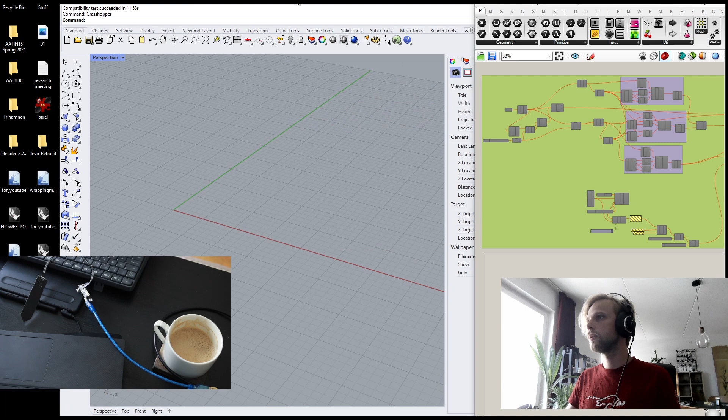Maximize that. Let's actually do it this way. Hello. Let's do it this way. Like that. Turn off that. You go here, or maybe here. Make myself smaller. And this way. There we go.

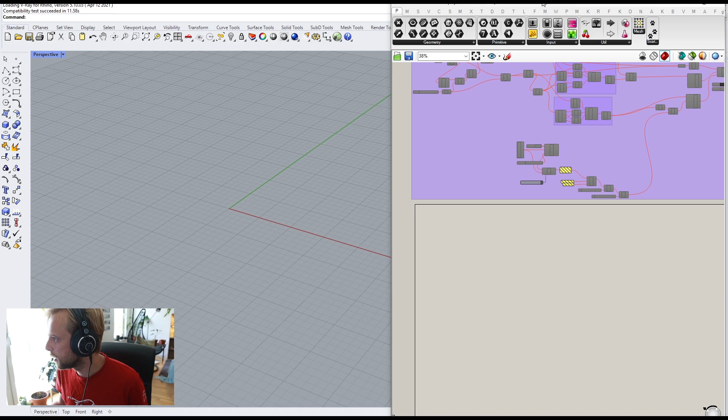So now, in here, I need to actually talk with Arduino through Grasshopper, right? So how do we do that? Well, the first thing is using Firefly. That's the plugin that we're going to be using, Firefly. You can download it from Food4Rhino, and just keep in mind it has a 32-bit version and a 64-bit version. You want the 64-bit version, not 32 bits. Okay, so you just download it, and you will find the Arduino tab here.

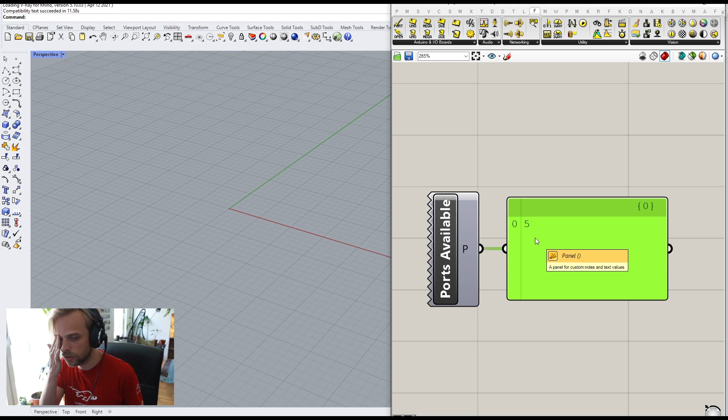And what you want to do is open up the Arduino port so that you can listen to what this moisture sensor is actually saying, what kind of number it's giving, right? So I will say com ports available. First, we check what kind of ports are available, like that. And I can see that if I just grab a panel, it says 5. That means port 5. And it's actually the same port that we used in our Arduino, so it makes sense.

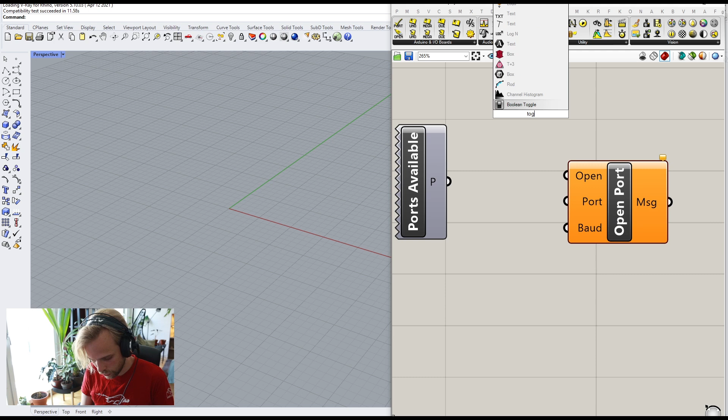And then under Arduino, we can open or close it, right? So open/close port, we choose that one. Bam. 3 inputs. First one, is it open or closed? I will want to open it, so I will use a toggle for this. And for now, we keep it closed, so toggle is set to false. Then port. We have the available ports here, and it's port number 5, so I just connect it, like so. Easy. And then the last one is the baud rate. Remember, 9600, the number that we used? This needs to match. If it doesn't match, it's not going to work. 9600.

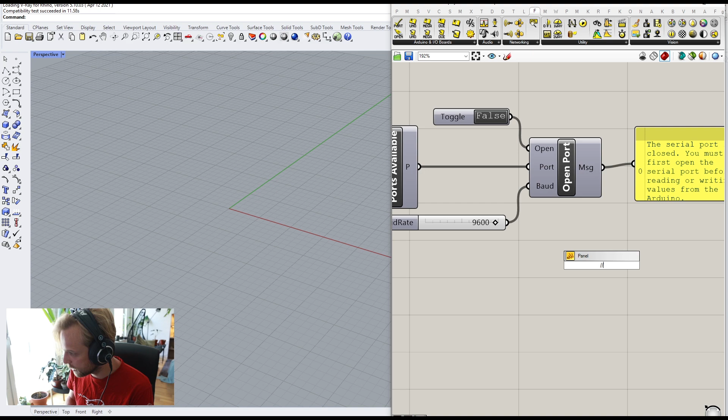Bam. Opened up. Well, actually, no, it's not opened up. It's closed right now, because toggle is set to false. If I grab a panel, by the way, double click creates a panel. The serial port is closed. You must first open the serial port before reading or writing values from the Arduino. Okay, sure. Double click on the toggle. It's true. Hooray, the serial port is open and you may now begin reading or writing data to the serial port. Okay, so we have opened up a connection to the Arduino within our Grasshopper.

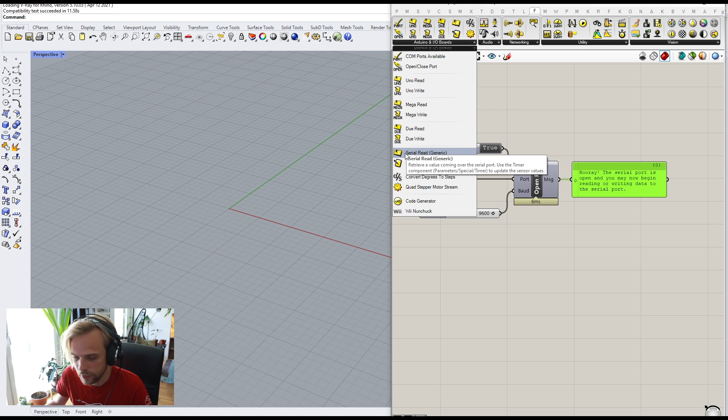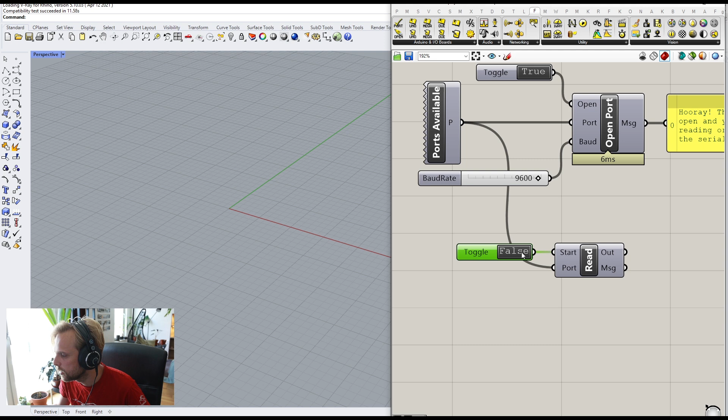Next step is actually reading something from the Arduino. In this tutorial, we're just going to read. So we will use serial read, generic, bam, and it's going to ask for 2 things: start reading and port number, right? So port is going to be the same port that we have available. That's easy. And start is going to be another Boolean toggle, right? Connect it to start. Double click on true. And now we are reading. So let's see what kind of output messages we get. Output 828, right? Message: now reading values from the serial port.

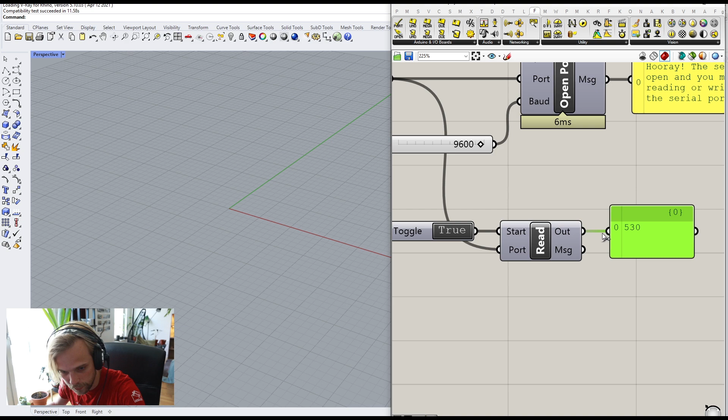There's a problem, right? 828, while this is indeed a value that we get from our sensor, it's not updating, right? Even if I put it in my mouth, see, it's not updating. It's still 828. The only way I can make it update is if I toggle it to false and to true again. Now it's updated, right? I'm holding it, so that's why it's 530 now, because my fingers are wet. Now I let it go, update it, 827 again. So it's not updating the way we like, in real time. How do we make it update?

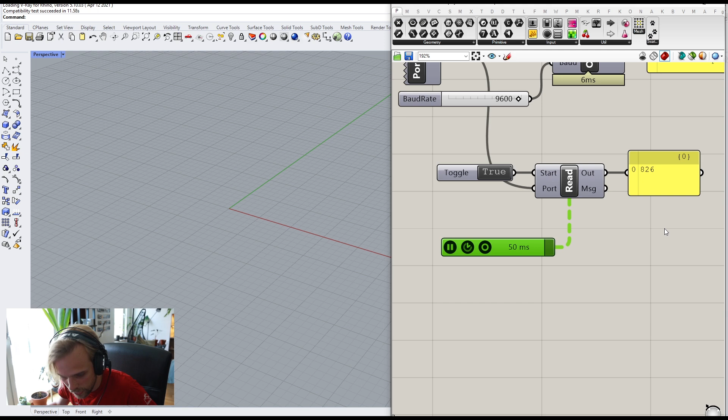Well, for those of you who are using Rhino 6, it's called timer, right? For those of you who use Rhino 7, it's called trigger, but it works in a similar way. For a timer, or for the trigger as well, you right-click on it. For interval, you choose 50 milliseconds, bam, and you just drag out of it and connect it to the read. So it's going to trigger a refresh for this node every 50 milliseconds. And you can see this number is now changing. If I hold it, bam, or put it in my mouth, see?

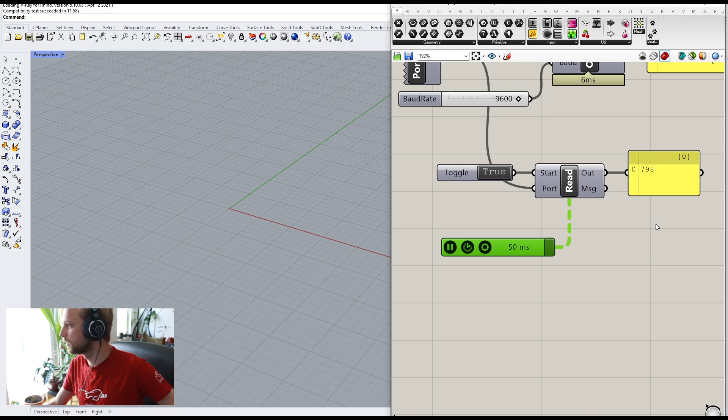Great, now we can control it. Now we're golden. Okay, for this, we need to create some sort of a form, something that will work.

And I will just grab a little bit of coffee and we will continue. So I drank my coffee and now we continue.

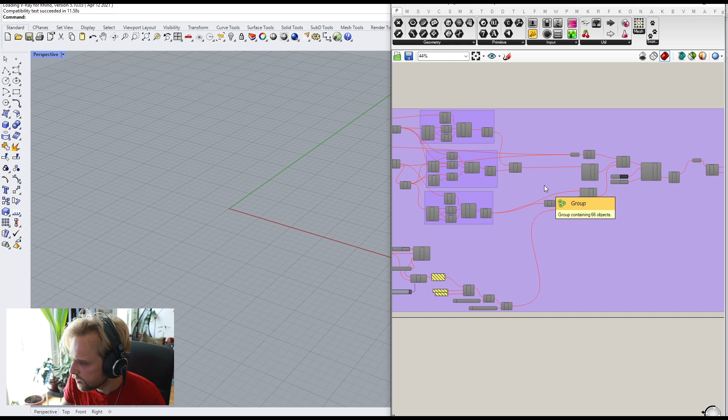So again, this guy is calculating correctly, and you can always just connect a sphere to it and a sphere radius to it and make the sphere contract and expand according to this number, but that's kind of boring. Let's do something more fun. So I've decided to do, how is it called, isotropic moisture bending, something like that.

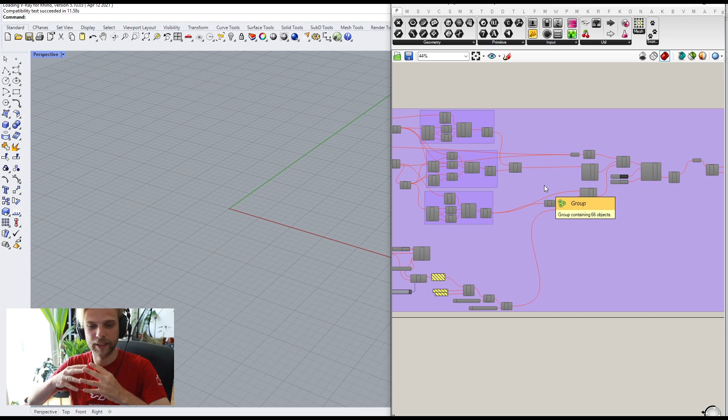When wood gets wet, or one side of the wood gets wet, it bends, right? We are going to simulate that with Kangaroo, and we're going to hook up Arduino to trigger that bending of the wood. So there's kind of an interplay between moisture and the actual plate bending and so on. It's gonna be fun.

So how do we do this actually? Do we just do a rectangle? Yeah, let's just do a rectangle. So I'm just going to create a rectangle in Rhino, starting from 0, and give it like 10 by 10 millimeters or whatever. Just a rectangle, and I'll use PlanarSrf, planar surface, to create a surface from that rectangle.

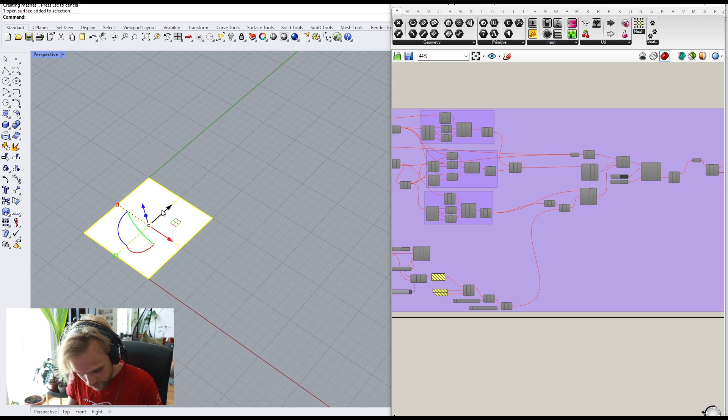I know this is a weird way to create a surface, but this is the one that I'm used to, and we're sticking to it. So we have this going. Then I'm going to just copy that rectangle, maybe 1, 2, 3, 4. Let's go for 5 times. That doesn't matter. So we have a bunch of these rectangles here.

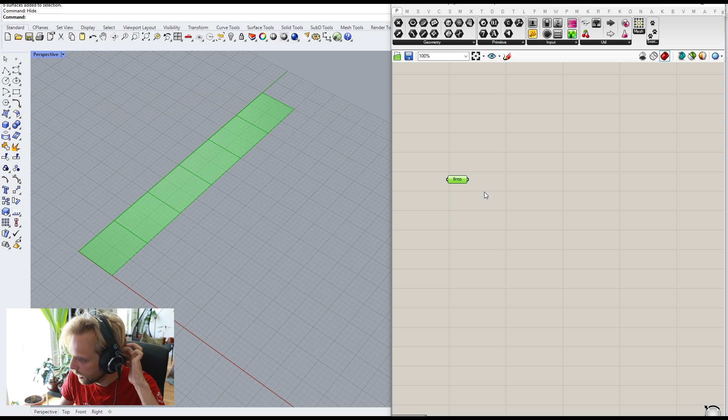So now I'll just move this a little bit to the side. I will reference them in as multiple breps. So right click, set multiple breps. All of these get referenced, enter, bam, they're now in Grasshopper. So now I can just hide them here so that they're not in the way. So these are breps. I will need meshes.

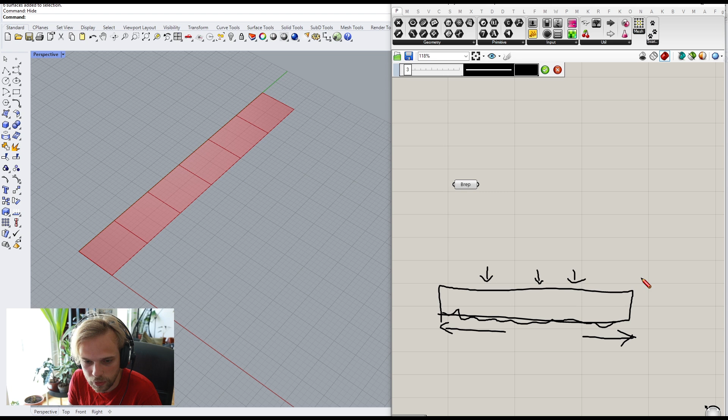By the way, just to explain what I'm after, let me scribble this. What I want to do is, if I have some sort of a form, and the bottom part of it gets wet, it will expand, while the top part is not wet, so it's going to stay as it is. So what it's going to do is bend, like so, because the bottom is expanding and the top is not.

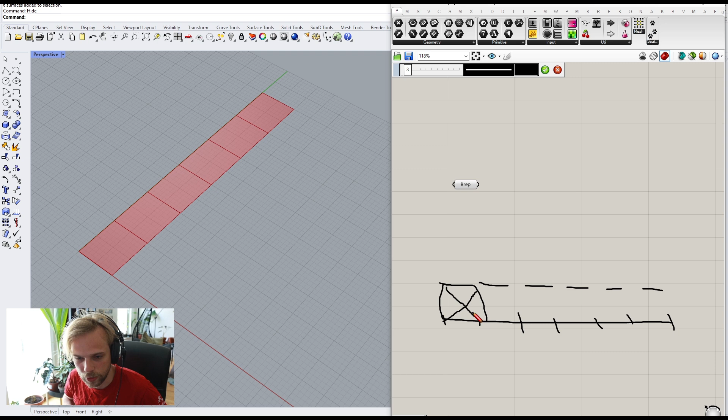So we're gonna try and do that by taking a surface in the bottom, divided up into parts, into polygons, and we have an identical surface in the top that's also made out of parts, and we interconnect them. Oh my God, I've just missed that line. But we interconnect them with this X system, so that every node between these two surfaces is completely tied together, and it's a rigid structure.

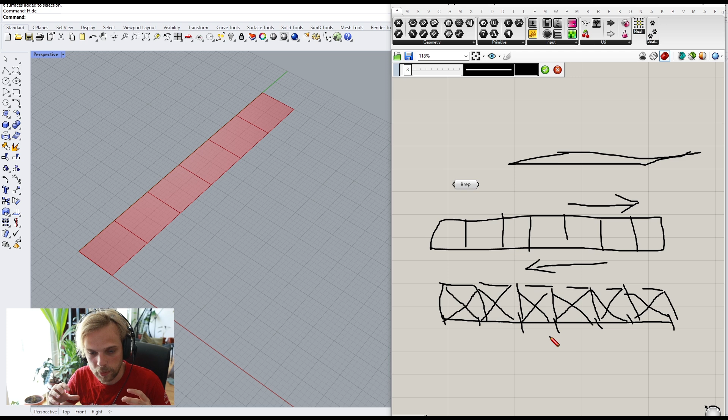I don't have the words to explain it well, but basically, if you have a structure like this, then all of the connections are interdependent. If you just had a structure like this, then it could bend this way, it could have this kind of a shear bending, where it just tilts. But if you have it cross-braced, it can't tilt, meaning it's a stable structure, and it's going to be a much more accurate representation of how the geometry would bend because of the moisture. Anyway, so that's the idea.

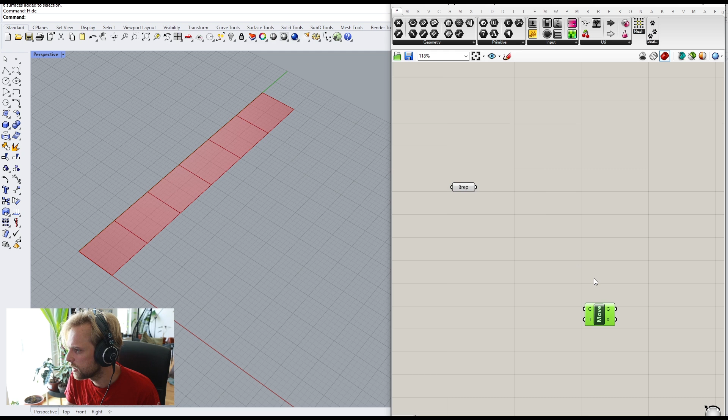So I have the surface here in the bottom, and then I'm going to move it. Or no, let's create. Do we need to create a mesh from it? Not really, huh? But let's still create a simple mesh from these breps. So we have like 6 meshes here, and we use mesh join to join them up into one big happy mesh. Okay, so that is done.

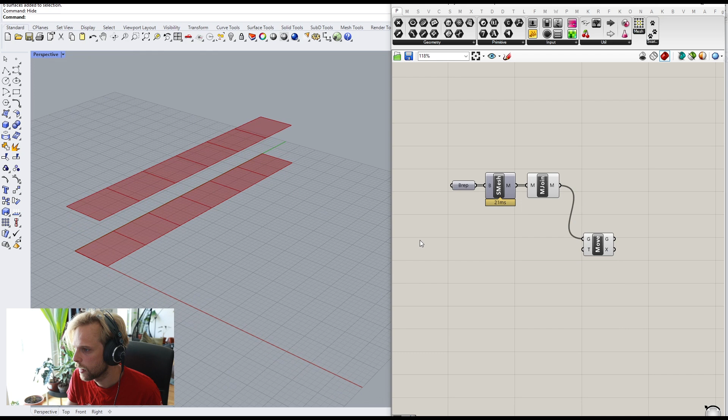We have a bunch of meshes here, and then one single mesh here, and then we move that mesh up in Z direction by, I don't know, let's do 5 for now. We can always change this, right? So we have the bottom layer and the top layer.

And the bottom layer is going to expand while the top layer stays the way it is. Okay. So now for the cross bracing, right? Let's maybe first create cross bracing for, let's just work on the bottom layer for now. And let's just create cross bracing right here, right? For every polygon, we create an X.

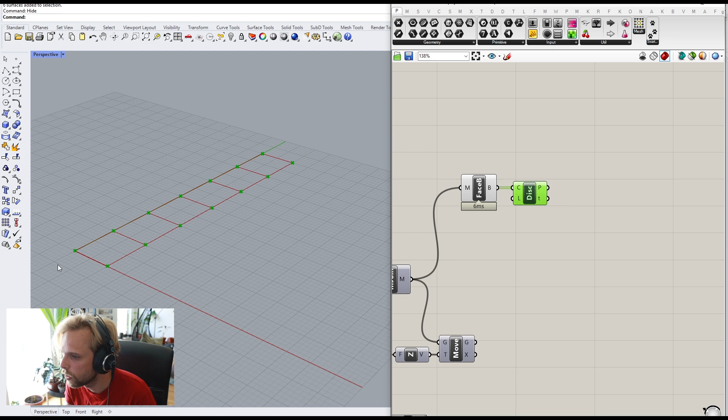So I'm going to say, give me face boundaries of this mesh. So I'm getting basically a polyline around each face of the mesh, face boundaries. And then for these face boundaries, give me discontinuities, corners, basically corner points, right? So I get 4 points for every polygon. And then I will separate those corner points into separate outputs.

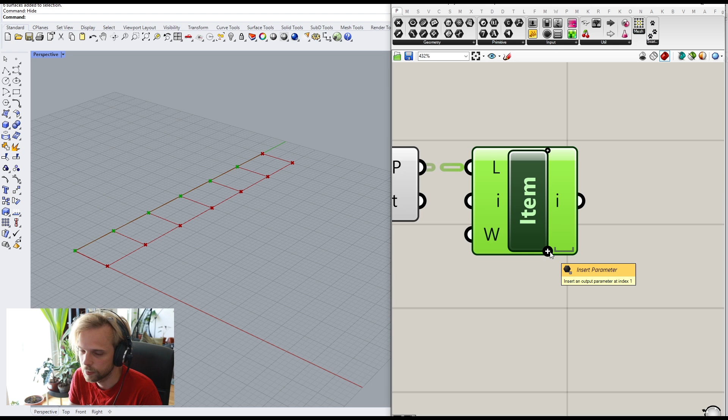List length? Nope. What am I saying? List item, not list length. List item can be used to separate these points. So this is point number 1 in the list, or number 0 actually. Point number 1 is here, point number 2, and point number 3. So I have 4 points here as separate outputs.

And now I'm going to just connect them, right? So if this is 0, 1, 2, 3, 0 needs to connect to 2, and 1 needs to connect to 3 with a line. So I'm going to use line tool, line between 2 points, this one right here. And I'm going to connect 0 with 2, bam, like that. And then I'm just going to copy paste, and connect 1 with 3, bam. I have an X now. Great. So this works, right?

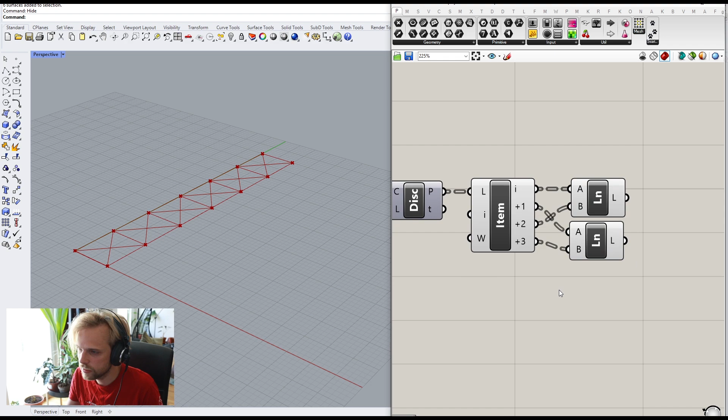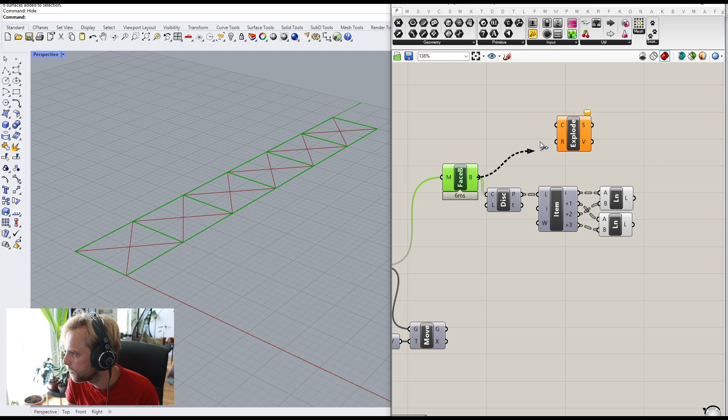And now, this is a separate line, this is a separate line, and these are polylines. So I don't want them to be polylines. So I'm just going to explode these rectangular polylines here to separate line segments. And then I'm going to merge all of these separate line segments into one list, right? So for that, I will use merge. Segments go into D1, lines go into D2, lines go into D3. There we go. Everyone is in one list.

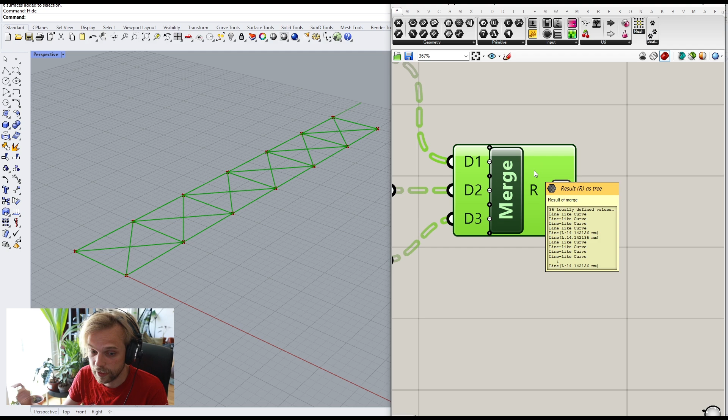Well, not quite, because you can see this dashed line. It means that there's a data tree going on here, and I don't really want a data tree here. So for the output, I'm just going to flatten everything out, right? So now everything is definitely in one list. But there is one thing that we still need to fix. This rectangle and this rectangle, they share one edge here, which means that there's a duplicate line here. There are 2 lines here, right? I want only one line to be here.

So what I'm going to do is I'm going to say remove duplicate lines. Remove duplicate lines like that. And it basically gets rid of all of the duplicates, right? It just keeps one instead of two. I can hide all of that. And now we have our cross bracing for the top done, right? I can just group it like that.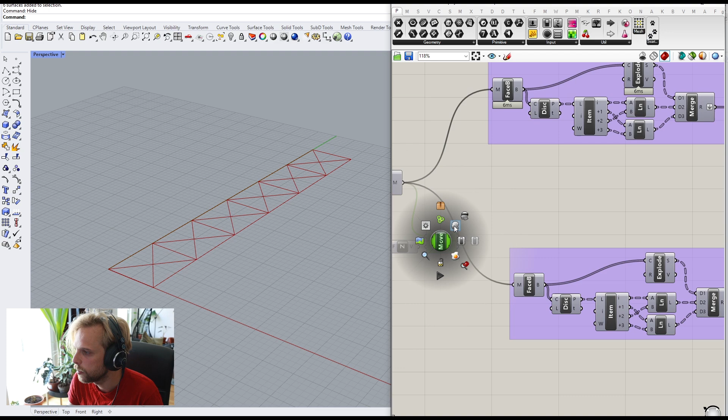I'll copy, paste it here, and use it for the top mesh as well, right? So all I need to do is just, bam, do that. And I have the cross bracing for the top. So that was the easy part. The hard part is going to be the sides, right? But I don't think that's going to be super hard to do.

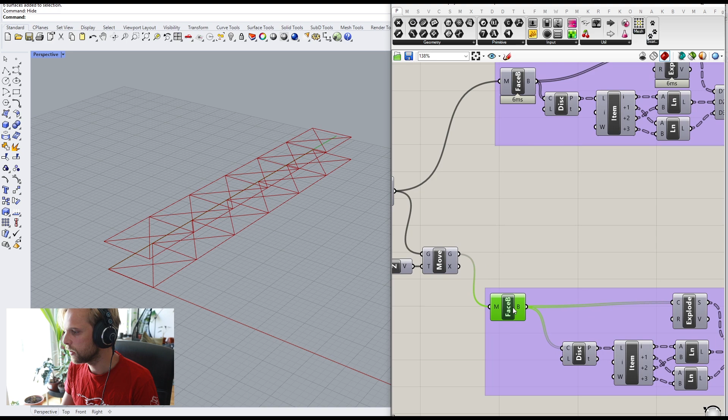So for the sides, let me just check how I did it. Yeah, all we needed to do was just shift, right? Yeah, that's fine. Okay, so we just shifted. So here we have face boundaries, and here we have face boundaries, right? Let me just show you. Bam, bam. These face boundaries. And these face boundaries have discontinuities. And I'm going to do the discontinuities again. I know that I could reuse the discontinuity nodes here, but I want to keep things clean.

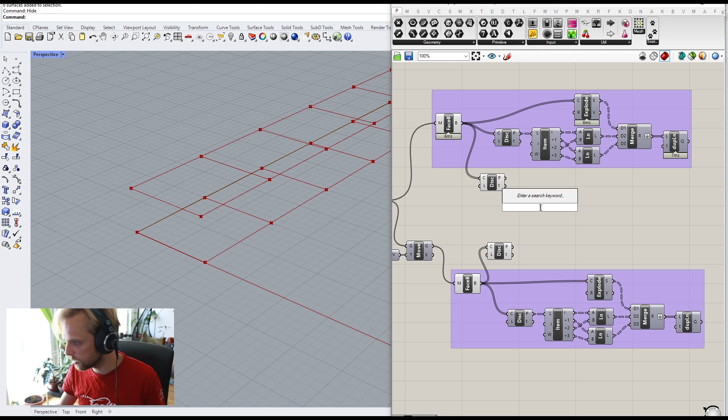So discontinuities come in from here, and discontinuities come in from here, right? So I have these points. And I can actually show you the numbering of these points by using point list. Point list tool, bam, like that. And then using size. Just a second, thinking. This is in millimeters, so let's use size 2. Like that.

And then copy paste. Like that. Okay. So now you can see the numbers for these points, and here where we have duplicate points, there are 2 numbers, but basically they match, right? So above 0 we have 0, above 1 we have 1, above 2 we have 2.

So to create vertical connections between these, all we need to do is just do a line between these points and these points. That's it. 0 connects to 0, 1 connects to 1, 2 connects, and so on. So we have vertical lines. There's duplicates here, but we will fix those in a second.

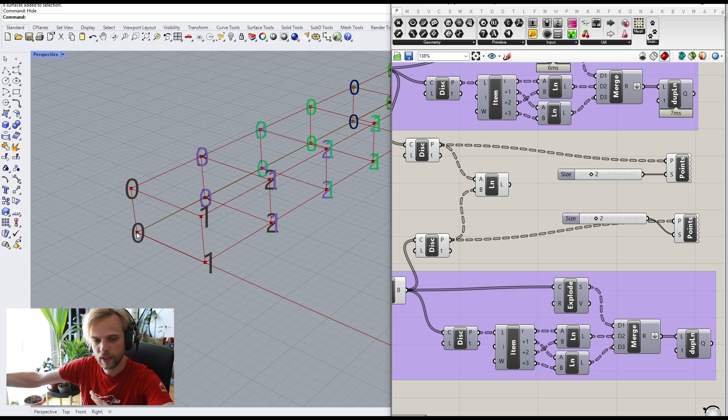The trickier part is the X cross bracing. And to do that, all we need to do is say that 0 needs to connect with 1, and 1 here needs to connect to 0. So we need to shift the list forward by 1 item, and then we need to shift the list backwards by 1 item, right?

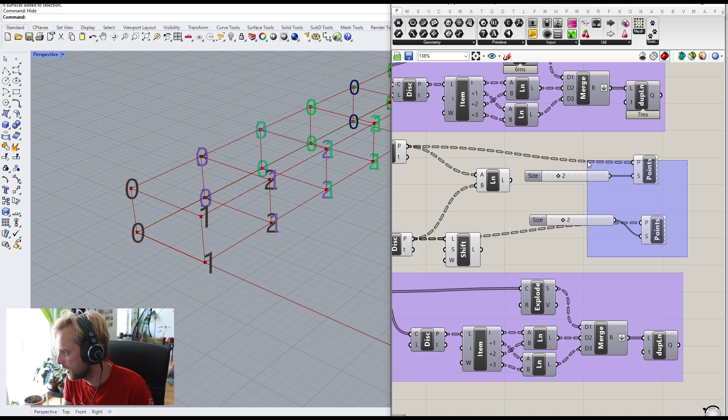So for this, we will use shift list. It doesn't matter which one we shift, the top or the bottom, that absolutely doesn't matter. So I'll just shift the top one, well, the geometrically top one, but in the definition, it's shown in the bottom. I'll shift that list, and by default, it shifts by 1, right? Actually, let me delete this so that it's not so much in your face.

So now with the line tool, it already will create a diagonal connection like so, right? 0 connects to 1. And now if I shift the list again, and I know this is getting cramped, I'm sorry about that, but this time by -1, I'm just creating a panel here saying -1, or you can right click on the S input, go to set integer, and type in -1, doesn't matter.

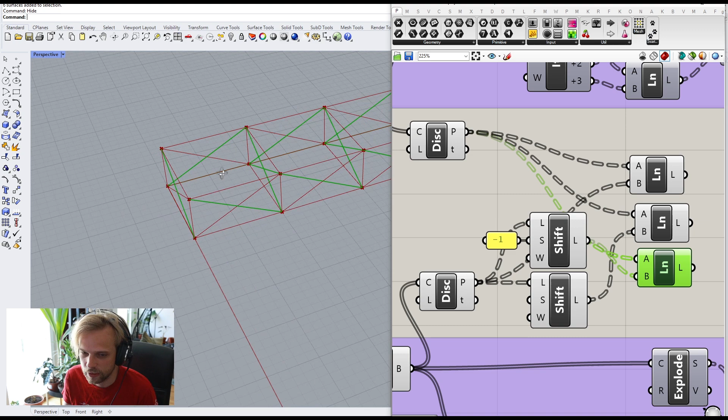If I shift it backwards by 1, and I create a line again between the bottom point cloud and the shifted point cloud, now I get the X cross bracing here. That's done. We have it. Everywhere where these boxes meet, it's going to be a bunch of duplicate lines. So we'll need to fix that. But we already know how to do that, right?

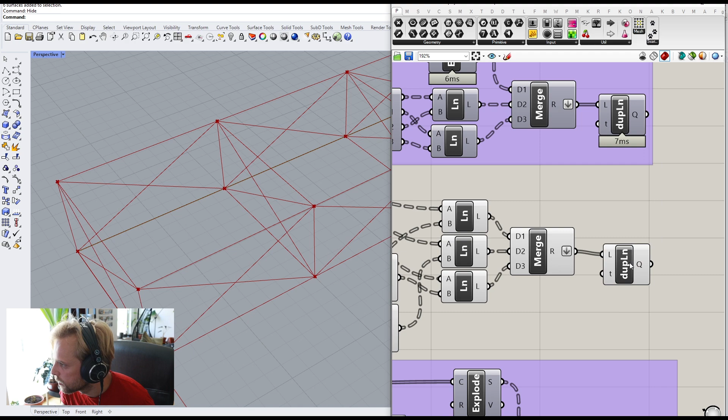We merge everything into one big happy list, like that. We flatten out the output, and we remove duplicate lines, like that. That's in Kangaroo 2, by the way, remove duplicate lines. And we have that. Part done. Okay. So now, what do we have here? We have cleaned up lines in the bottom, in the top, and in between, right? So now we need to come back to our idea of how that whole expansion is going to work.

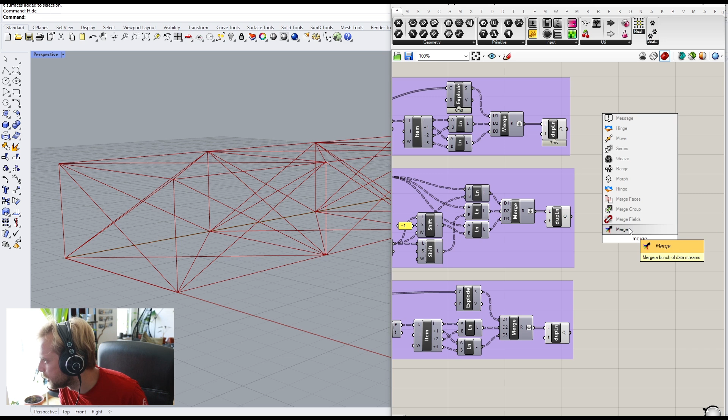The ones that are on the bottom, these ones right here, are going to expand, right? And the sides as well as the top are going to try and keep their original length because they're not wet. They're not expanding. So I'm first going to merge the top as well as the sides to one list just to keep it clean, right? And here I'm just going to have this as a separate output.

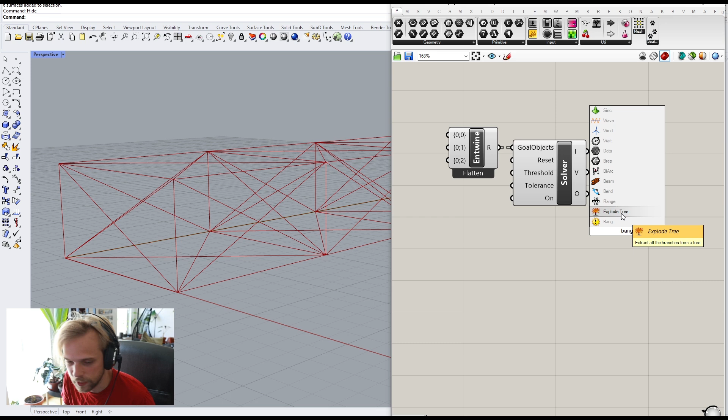So now it's time to actually use Kangaroo. Kangaroo 2 uses a solver. So we're going to use a Kangaroo solver. For goal objects, we are going to use an entwine. This will just help us make a data tree and keep all of the inputs clean, right? And for the output, we will use explode tree. So we're basically creating a data tree and then exploding it into separate branches.

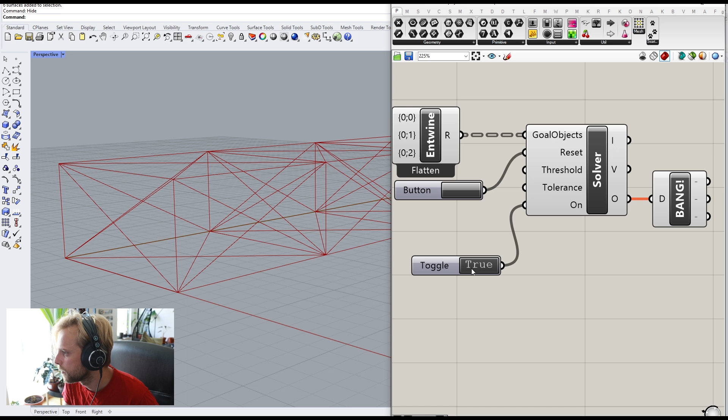Then we will need a reset button, and an on and off switch, which is going to be a toggle. Okay, so we have our initial Kangaroo setup done. So now what are the goals for our simulation? Well, goal number one is always show. We're going to show some sort of geometry after the simulation has finished, right? So what kind of geometry is it?

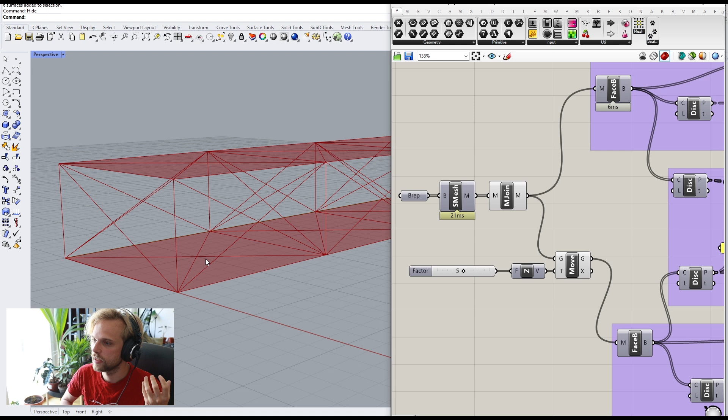Well, we will still need to make it nicer, but it's basically going to be the bottom mesh as well as the top mesh. Do we color code it? Let's color code the part that actually expands, which is going to be the bottom mesh right here. So that is going to come in as a separate mesh. So I'm just going to straight up connect it to show, like that.

But for the top mesh, what I want to do is take its mesh edges. I want to take all of its naked edges and I want to extrude those naked edges in Z direction.

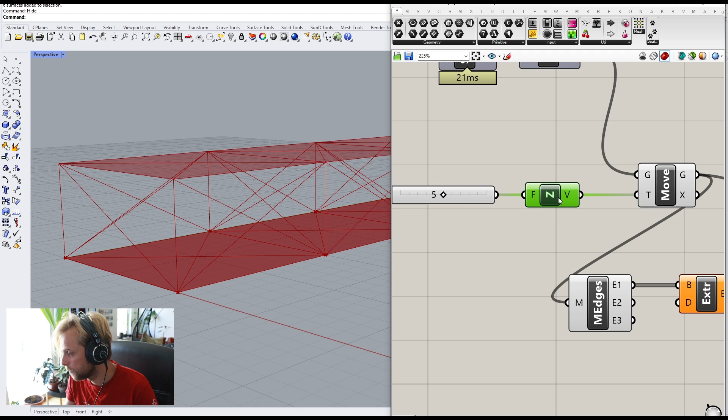Or actually, we can just use this one straight up. So we are moving it up by 5, right? So we need to extrude the perimeter of it down by -5, because it's down, right? So I will just use the negative value of this vector, and I will just straight up connect it to the D input here. And that's it. We have our...

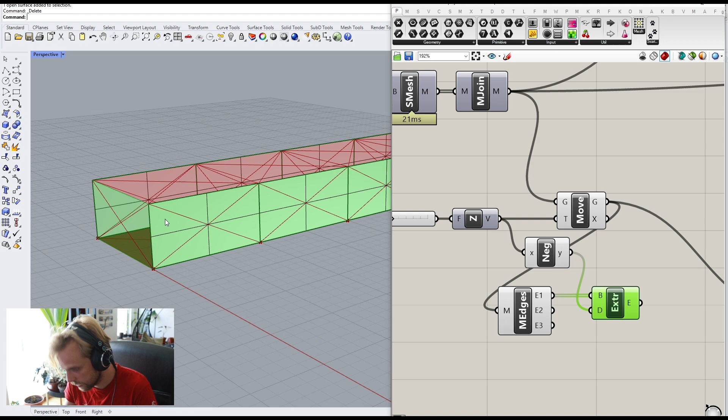Wait, what is that? Wait. Something strange. If I delete this, no, this is clean. Okay, never mind. Sorry. Just a visual glitch. Okay, so now I've just extruded the perimeter down by 5,

and I will just convert it to simple mesh. So these extrusions are being converted to a simple mesh, and they're going to be joined, mesh join, with the top, right? With this. And simple mesh, holding down the shift key, gets joined up here. And just in case, I will right click on the M input and choose flatten so that everything is flat. Everything is in one list.

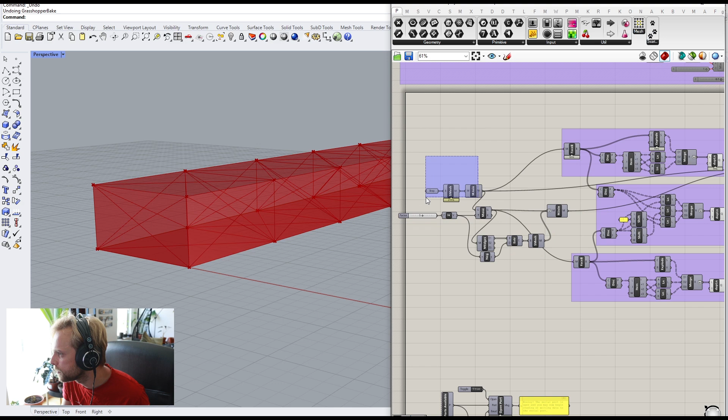And then again, holding the shift key, I will connect it to the show input right here because we will want to show it. Bam, like that. Okay, this is a little bit messy, but it is what it is. So our show input is done, and we can see that bang actually gives us an output. The output that bang gives us is 2 meshes, the ones that we are telling Rhino or Kangaroo to show.

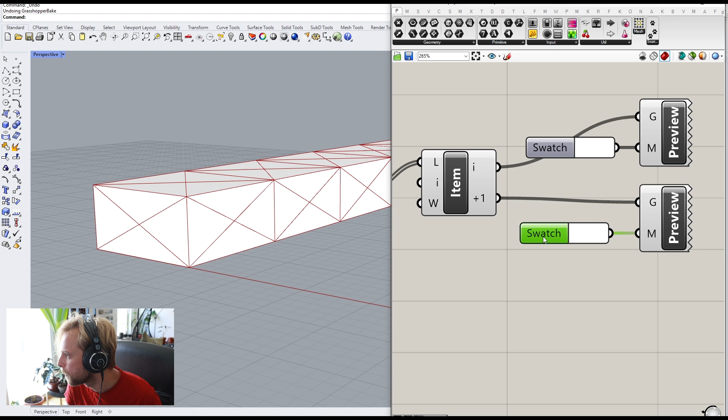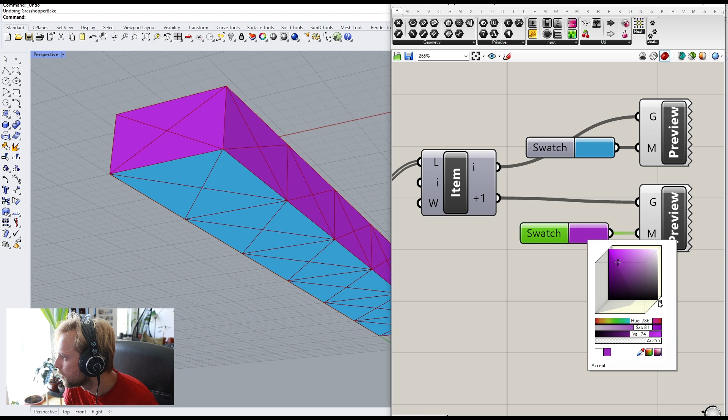So I'm going to use list item to separate them into 2 separate entities, first and second one. And I will use custom preview for the first as well as the second one. And I will use color swatch to control the color of both of them. So for the bottom one, I will change the color to blue. And for the top one, maybe purple. Come on. Oh, purple is whatever. Let's go for dark pink.

So we have blue that is going to be expanding, and we have dark pink that is just not expanding, the rest of the geometry. Okay, so that works. And actually now we can make this thinner, like that. Okay, next up, expansion, the actual expanding part of it. That is actually quite simple.

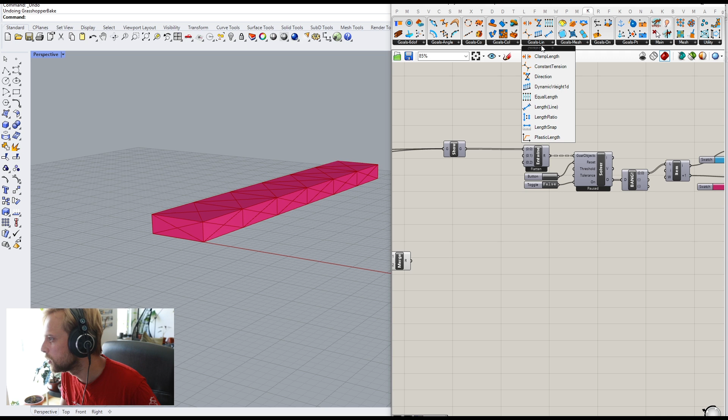Under the Kangaroo 2 tab, under goals line, you have length (line). It's asking us to give it a line segment, so I'm going to give it all line segments that are in the bottom. And it's asking us for a length, and we don't really have a length for them. So I'm just going to measure the length of a curve. Just type in length, and measure the lengths.

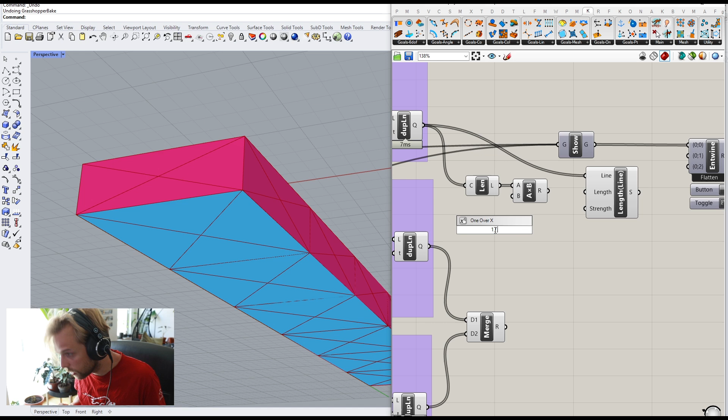And we can multiply the lengths by a factor. So let's say we have a slider that starts at 1 and ends at 2. And actually, let's give it 2.000 to give it more resolution for the slider. So a slider between 1 and 2. I connect it to the multiplication.

What it does is it takes the lines, takes their original length, and if we have it set to 1, it keeps them at their original length. If we have it set to 2, it expands them twice, to 200% of their initial size. So it just multiplies. I connect it to length like so, and connect the spring output to the 0, 1 input of entwine. That's our second goal.

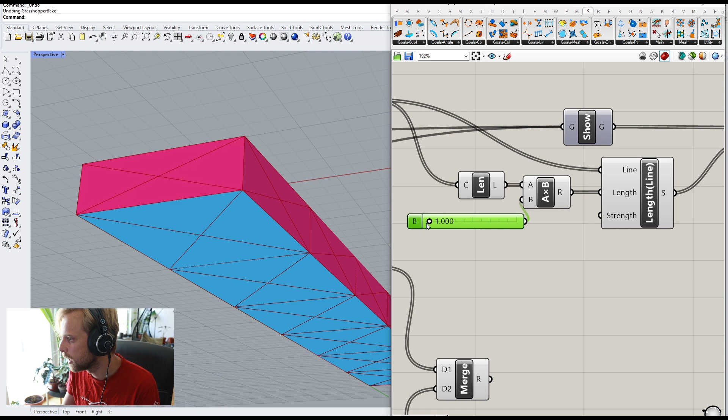If now I reset and run the simulation and actually expand this, you can see that it's kind of boring. It just basically scales everything up, nothing fancy, and then scales everything back down. That's because there's nothing that would restrict the scaling. So now it's time to actually make it restrictive. For this, I need all of the remaining lines not to expand, or try not to expand. So I'm going to use length line again.

I never can find it. Goals line, length line, this one again. This time I'm going to use all the rest of the remaining lines. I'm still going to use the length measurement, but this time I'm just going to connect it straight up into the length input here.

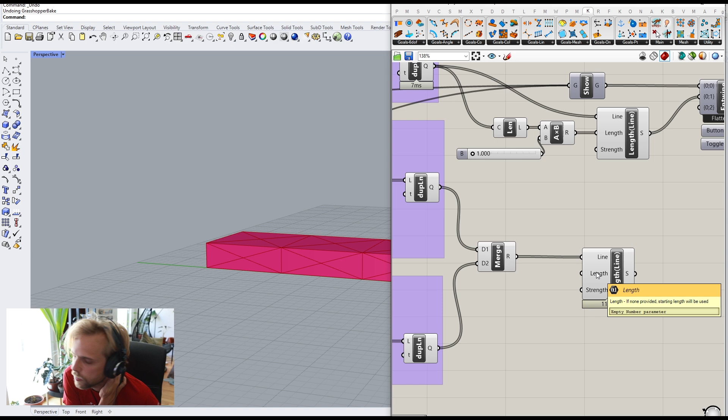I think even if you don't do it, what does it say? Length: if none provided, starting length will be used. So even if we don't connect anything to this, all of the lines will try to keep their original length. That's great, we just keep it this way and connect it to zero-two input here.

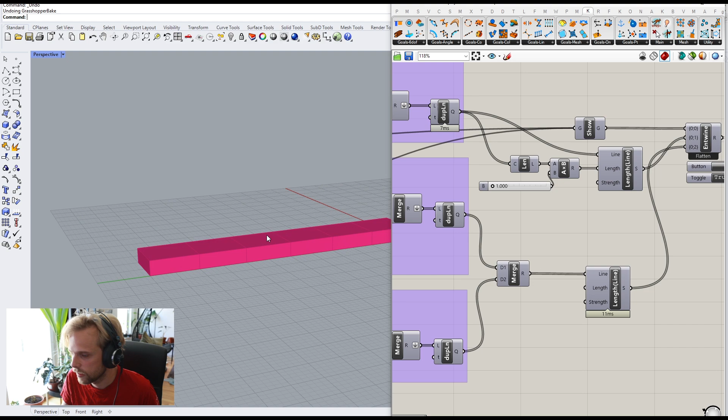Disable preview of all of this. Moment of truth. Reset, play. Okay, nothing exploded, that's good, that's always good news. Expand. Bam, bending, yay, we have it working! Okay so now we have it working, and of course if you really break it, it's gonna break, there's no denying of that. But it is working, sweet.

Now it's time to actually work with this, right, with our Arduino. So the thing is, we do have this number that is constantly fluctuating.

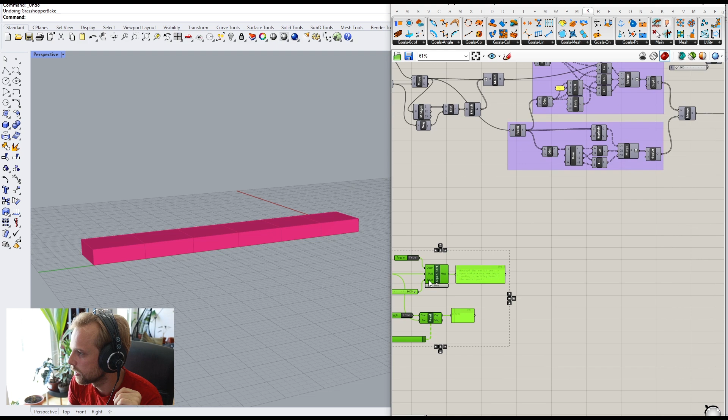Let me group this and change the color of this to white. There we go. So we have a number that is fluctuating, and I can extract it just to keep things clean, like that, as a number. And we want that fluctuating number to influence this instead of the slider, right?

So I'm going to stop the simulation, delete the slider, right, and then think about how can we convert 828 to a more reasonable number, because the 828 times the size of the initial curves will not work.

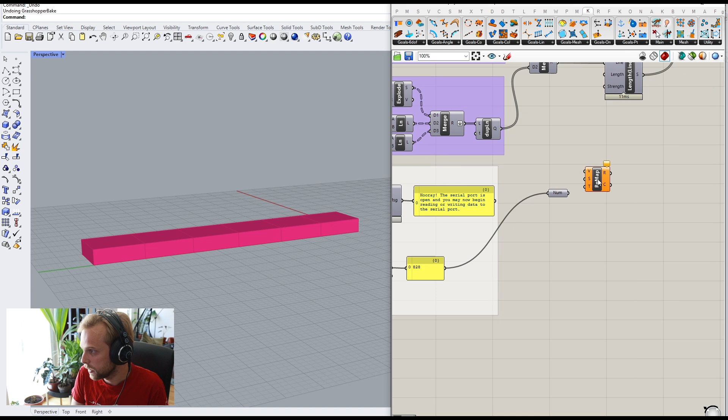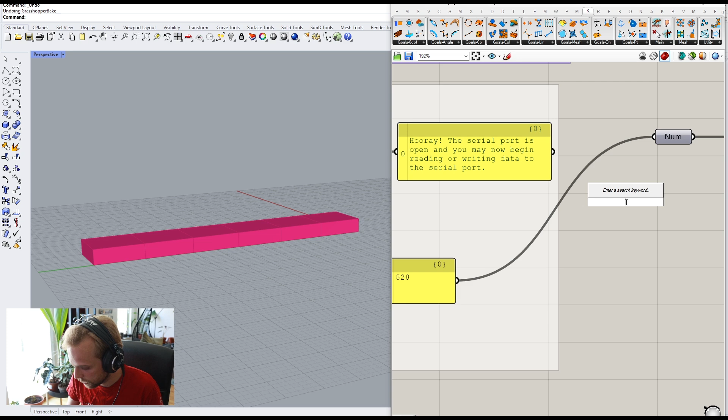So for this I will use remap numbers. I will say that my source domain - what's the smallest number and the largest number that I am expecting to get from this sensor? The largest number is, let's say, 800, and the smallest one is, let's say, 400. So I'm going to write dash-dash 400 to 800, like that. There we go, so now we have a range between 400 to 800.

And then our target domain is what kind of range these numbers have to be remapped to, right? So what's the smallest number then, and what's the largest? Again I'm going to write dash-dash, I'll say the smallest number then is 1, and the largest one is, I don't know, 1.3 - that's how much it expands, or 1.4 maybe. How much it expands, right? Like that, 1 to 1.4.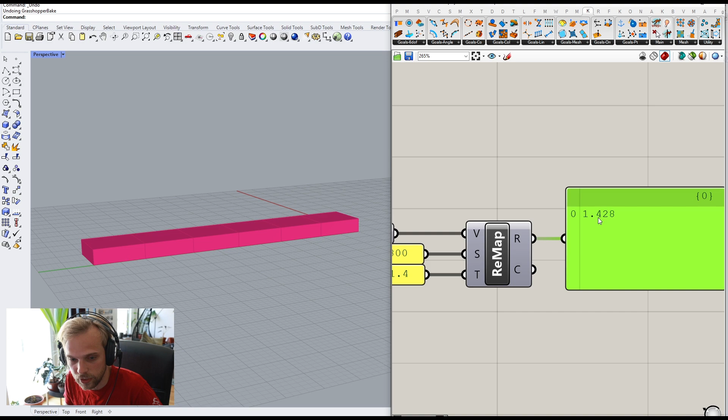Connected to the target domain. So now if I look at the panel here, the output, I can see that it actually gives me a larger number than 1.4. That's because here it says 828, not 800, so it goes beyond my boundaries here.

And I think if I put this sensor again - I keep putting it in my mouth, I need some... oh, I can put it in my cup of coffee. If I put it in my cup of coffee - never mind, that's not good enough. So let me put it in my mouth actually.

See how it went lower than 1? That is because it went below 400. So I need to have hard caps for 400 and 800, and it's very easy to do.

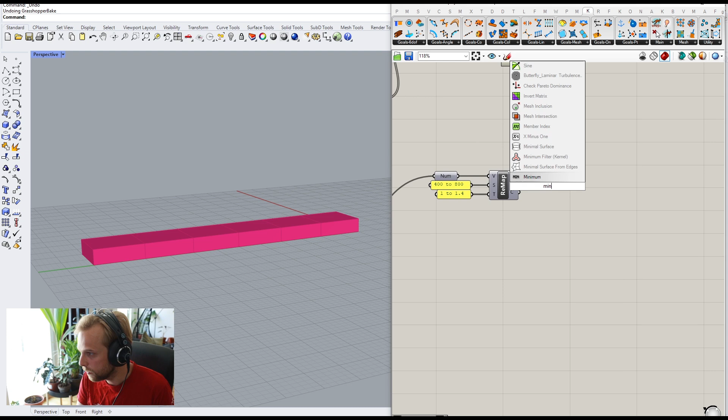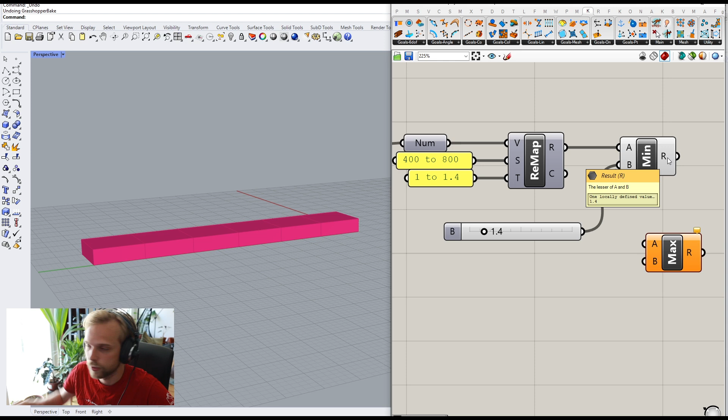I just do minimum, and also I will do maximum. So my minimum number is going to be... wait, sorry, not 400, we're dealing with these numbers now. So my minimum number is going to be 1.4 - no, it needs to be 1, isn't it? Wait, let's check - no, it does need to be 1.4, because it gives you the lesser number of the two. So minimum connects to the larger number here, and maximum - we run this through maximum again - connects to the smaller number here, which is going to be 1. Like that, that's it.

That's all we need to do with the number part. Now we have, not a slider, but rather a number that's going to fluctuate between values that are between 1 and 1.4. The only problem is that if it's dry, it gives me a large value, and if it's wet, it gives me a low value.

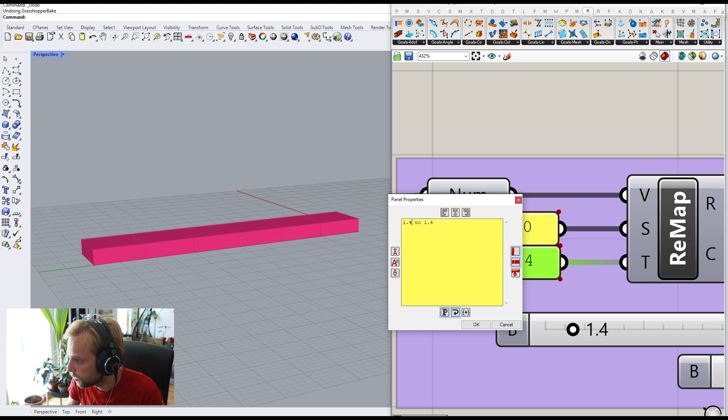So I need to reverse these. I'm going to say, instead of 1 to 1.4, I'm going to say 1.4 to 1. That's it, that should work. Now it's by default going to give me small numbers, and it's also not going to fluctuate. But if I kind of touch it...

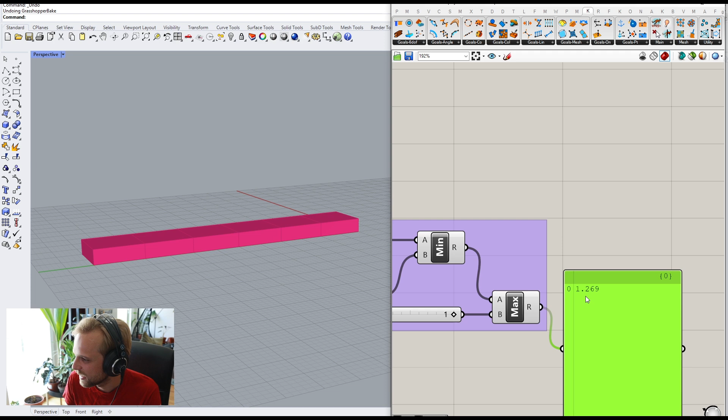That's a cool bug right there. But if I touch it now, it gives me a larger number, right? Okay, that works. Let's just straight up connect it to the length line and see what it does. Bam, like that. Reset, run.

Are you ready? Wait. That.

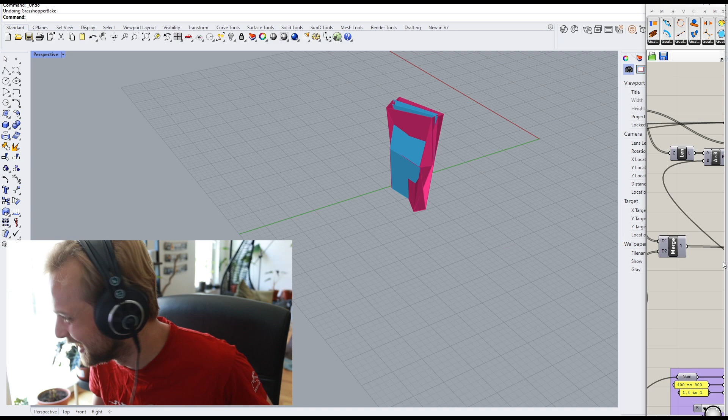Okay, here's my sensor, and bing. Okay, that was way too much. Instead of 1.4, let's do like 1.1.

Reset, we try again. Look at this. Bam, bam. How cool is that, huh? I mean, yeah, it's a floppy thing.

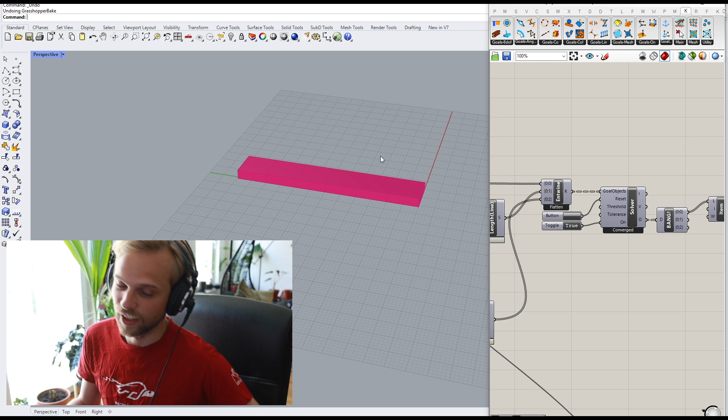It's nothing special right now, but imagine the possibilities. Right now we're just dealing with a moisture sensor, but there are light sensors, proximity sensors, CO2 sensors. So if you breathe on a model, it's going to do something. There's a lot of different possibilities here, and I'm definitely going to work with those and try them out, try to see how those work.

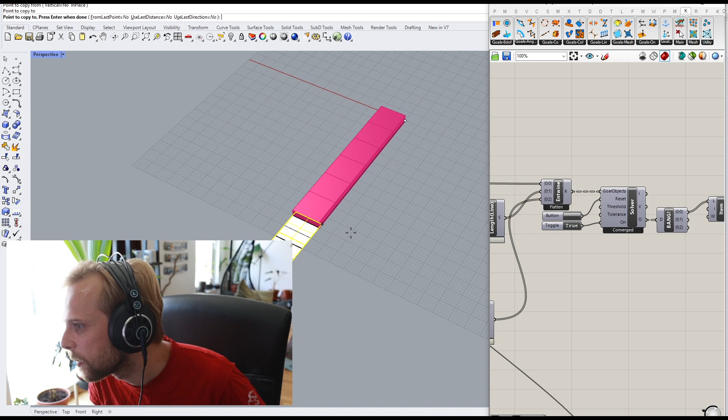For now, just to finish this tutorial up, I'm going to take these surfaces here and make a copy, not in place copy, like that. I just want to see how fast this is, if this is going to lag or not.

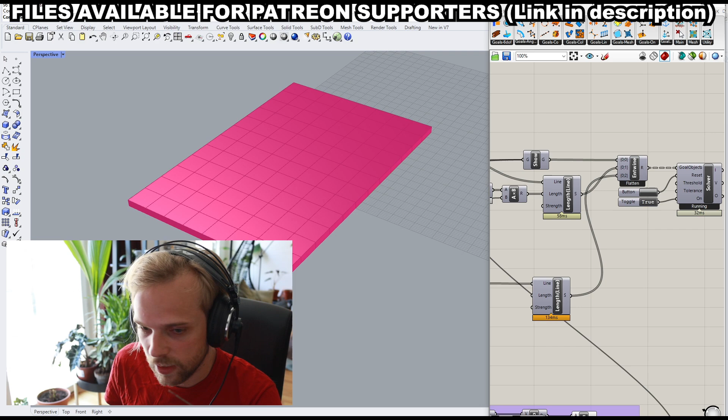Oops, that's the wrong camera. There we go. Put it here. And 1, 2, 3, go. And release. Mouth. Nom nom nom. Okay, enough playing around. This works.

Another successful tutorial. But wait, there is more.

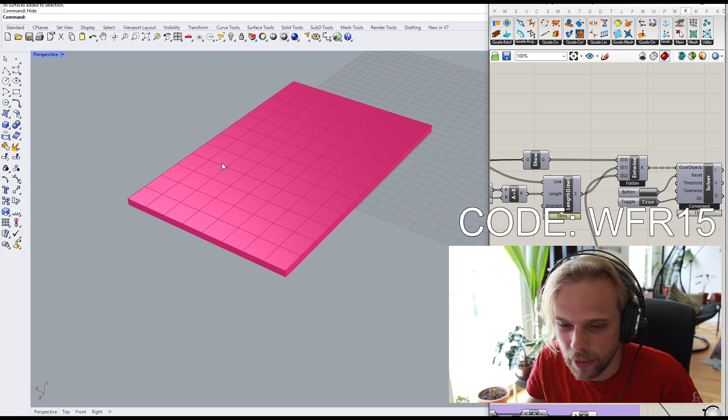Anyway, back to our little definition here. This definition you can build yourself, it's not that big of a definition, but if you're super lazy as per usual, it's available for my Patreon supporters.

Next up on this YouTube channel, we're going to look deeper into robotics and architecture, and not just architecture, robotics in general, and how we can bridge that gap between the physical and the digital, through sensors, through using Grasshopper to actually control a physical model, be it an architectural model or a robot in reality. That's at least where the next few months of this channel is going to head. Once that is done, I have no idea - we'll just find another really cool thing to investigate and learn about. So, hope you enjoyed this one, and I'll see you next time. Later.